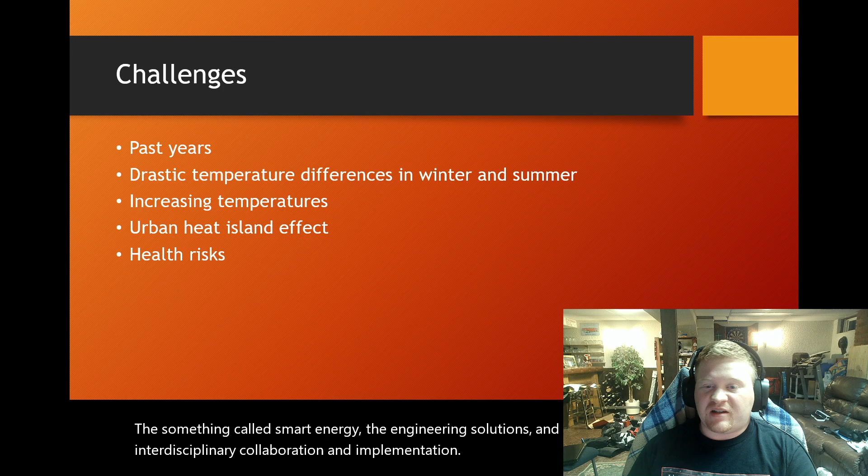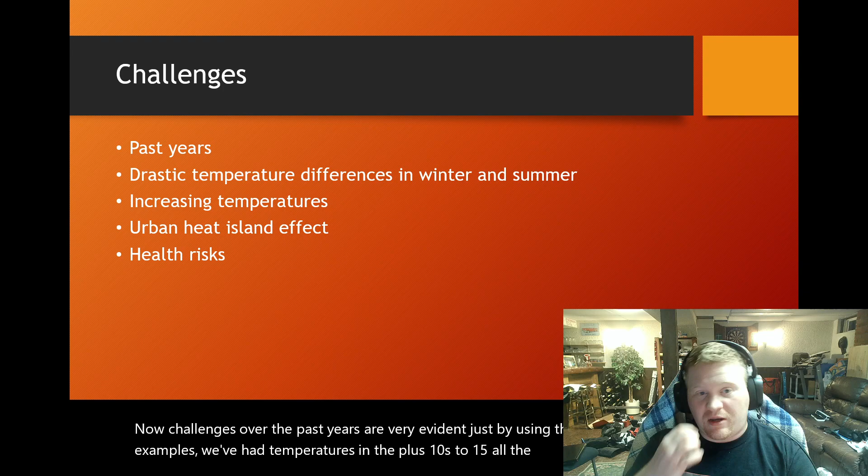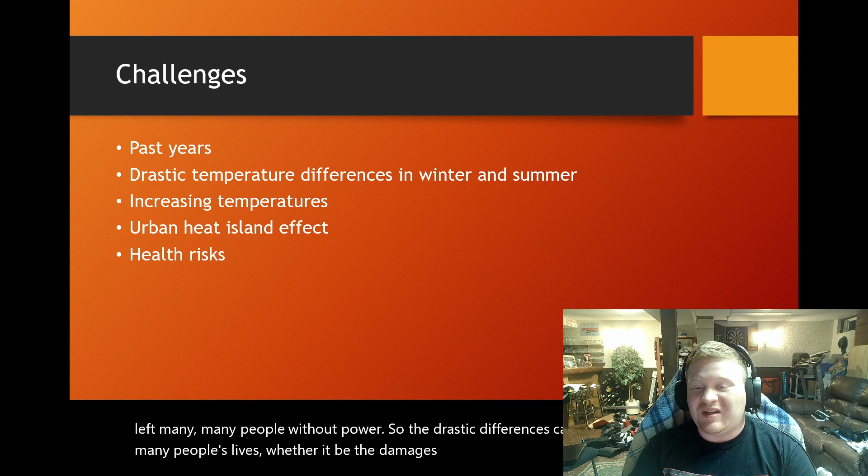Challenges over the past years are very evident just by using the last few weeks as examples. We've had temperatures in the plus 10s to 15s all the way to freezing rain, which has left many people without power. The drastic differences cause complications in many people's lives, whether it be the damages caused or the inconveniences at the tail end of the temperatures, mainly the heat.

There's a thing called the urban heat island effect, where areas like Toronto face amplified heat due to materials like asphalt and concrete, raising the temperatures further.

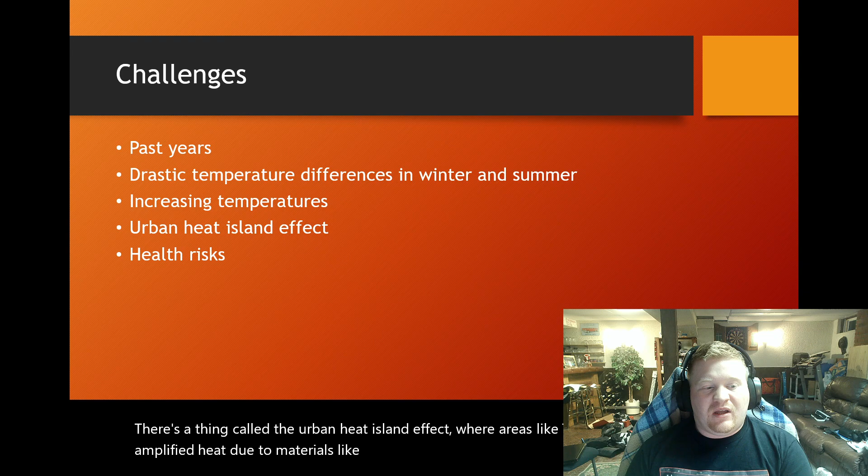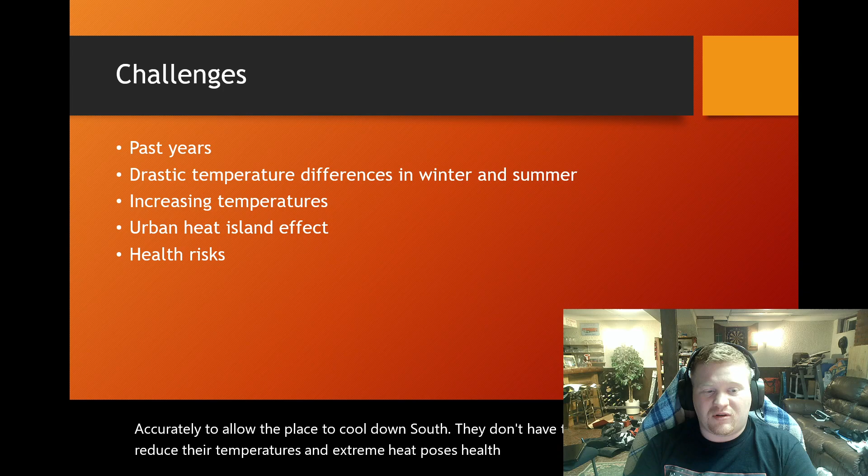Due to the buildings constantly surrounding the area and their height, they retain that heat. There's not a lot of room for wind to flow to allow the place to cool down. So they don't have too many alternatives to reduce their temperatures, and extreme heat poses health risks such as heat stroke, dehydration, and respiratory issues, especially for vulnerable populations such as the homeless, elderly, or those with pre-existing health conditions.

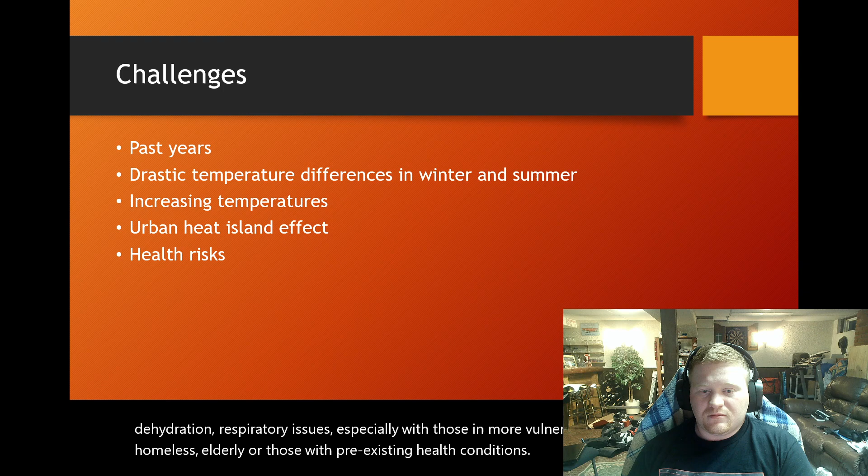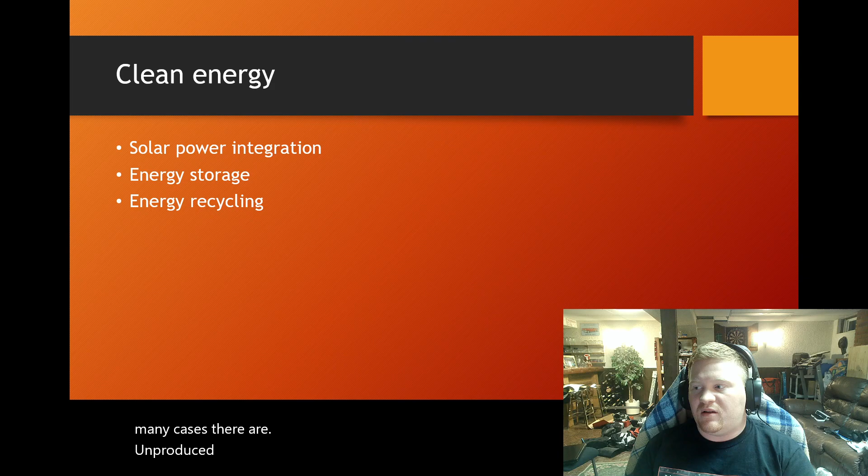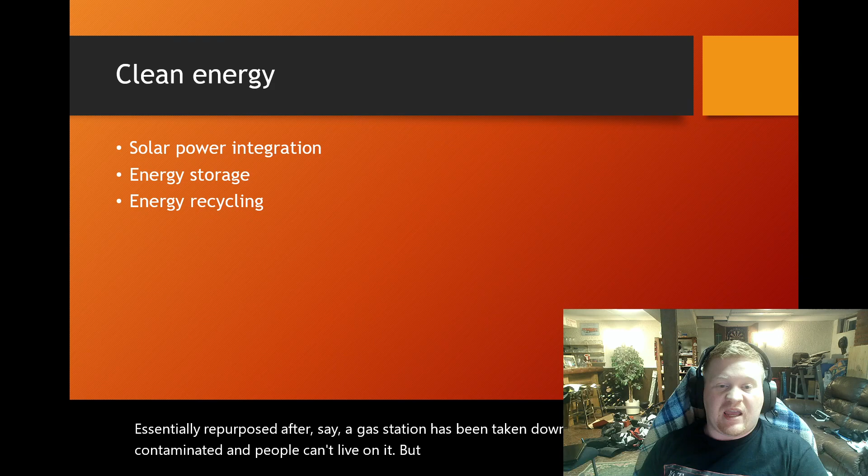Some of the ways you can go about it is by using clean energy, such as solar or wind power. Solar panels provide abundant electricity during peak sunlight hours, and in many cases there is unproductive land that hasn't been repurposed after, say, a gas station has been taken down because the area is contaminated and people can't live on it. But that's not to say we can't build on it and make use of the land for the 12 to 50 years it could potentially stay unused while the area cleanses itself naturally.

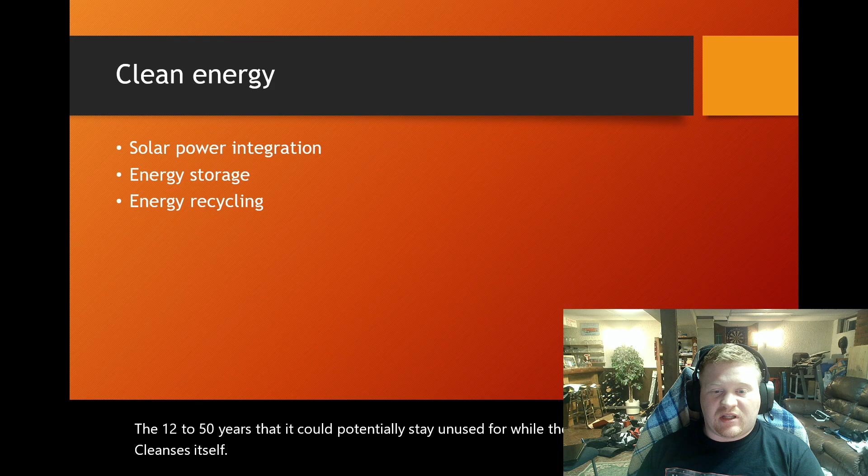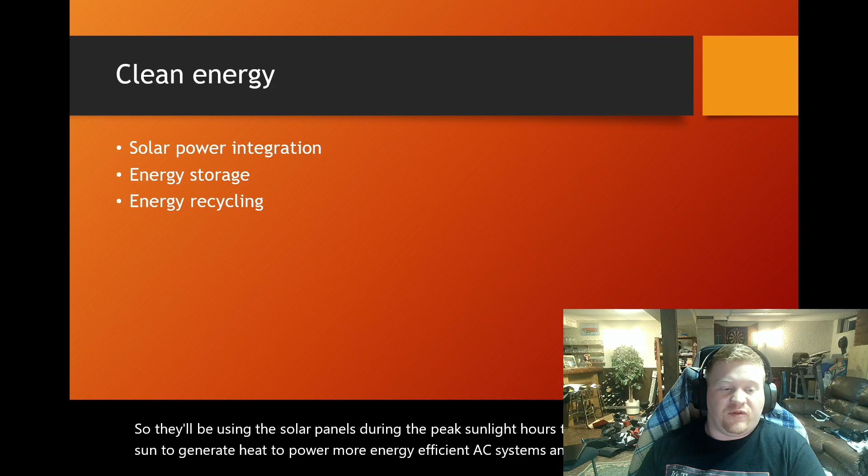They'll be using the solar panels during peak sunlight hours to absorb the sun's rays to generate power for more energy-efficient AC systems, reducing the reliance on fossil fuels, which other people might be using for generators to power their AC systems.

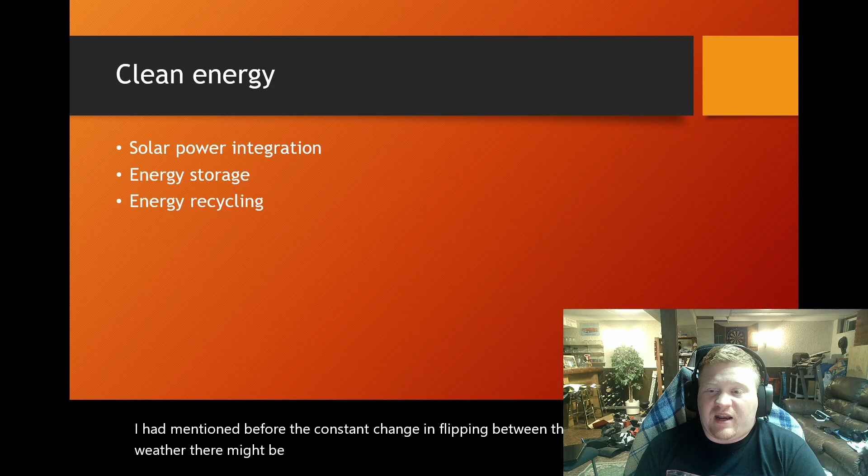The other thing would be the excess energy created by the solar panels can be stored in batteries for use during non-sunny periods, improving efficiency and reliability. Like I mentioned before, with the constant flipping between temperatures and weather, there might be times where we do not have extreme heat and we'd be reliant on that stored backup energy.

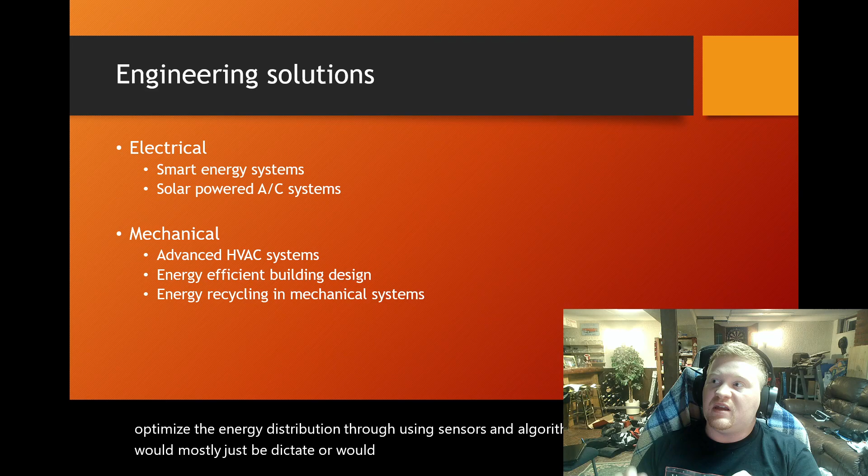The engineering solutions would be very straightforward. We can use smart grids to optimize energy distribution through sensors and algorithms. These sensors would mostly be measuring the existing humidity and temperature on multiple surfaces to see where the heat would be most affected, so they could distribute energy for those AC systems more efficiently.

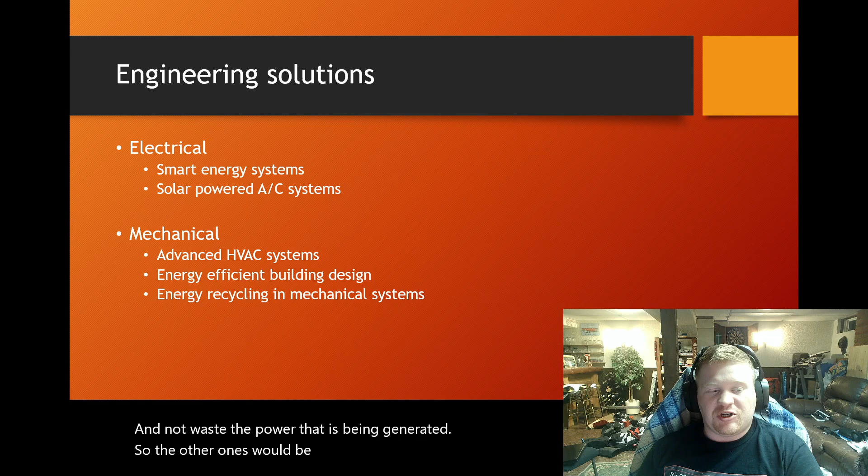And not waste the power being generated. The other aspect would be mechanical engineering, where energy-efficient HVAC systems would use variable refrigerant flow to properly adjust cooling output based on room occupancy.

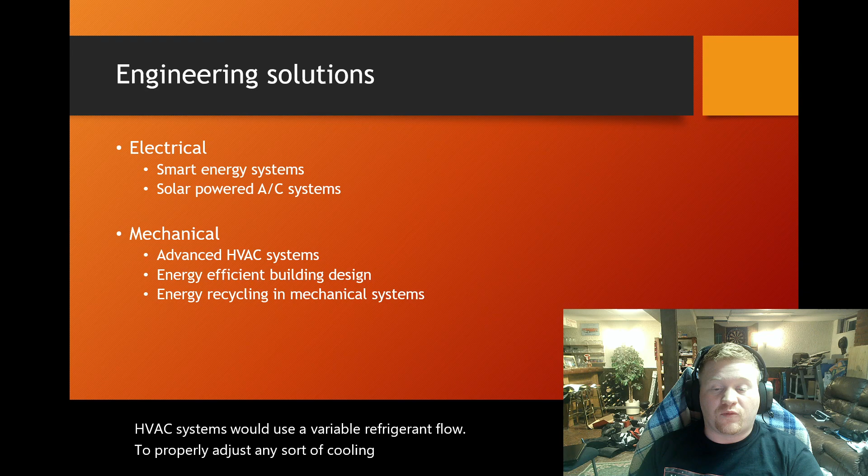If a room would only require 5 to 10 people in it at max, it wouldn't need as much as, say, larger rooms with higher ceilings, to allow heat to rise and circulate the air conditioning better.

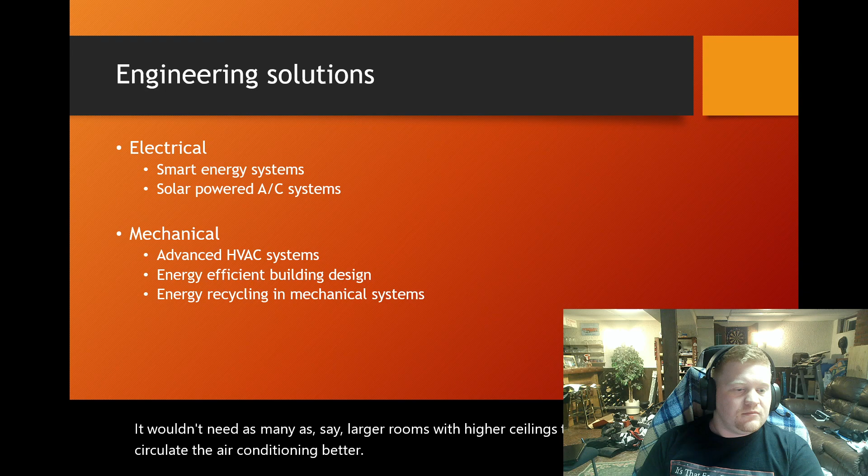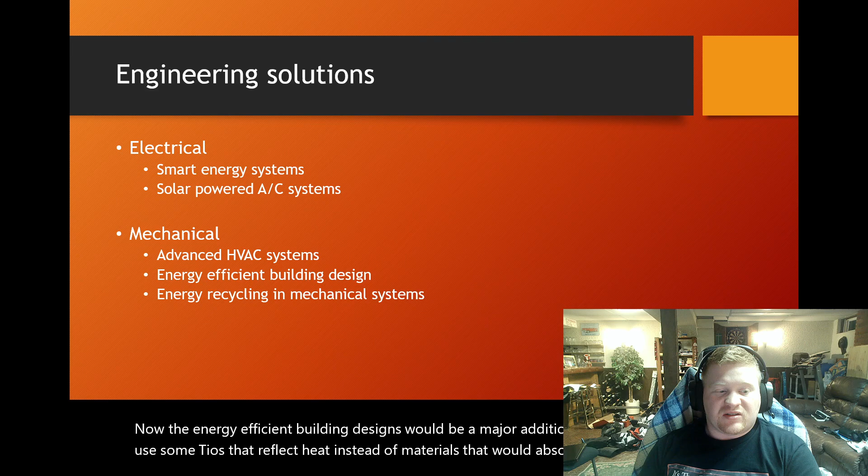The energy-efficient building designs would be a major additional plus, where you could use materials that reflect heat instead of absorbing it, such as green roofs and reflective coatings, to lower indoor temperatures.

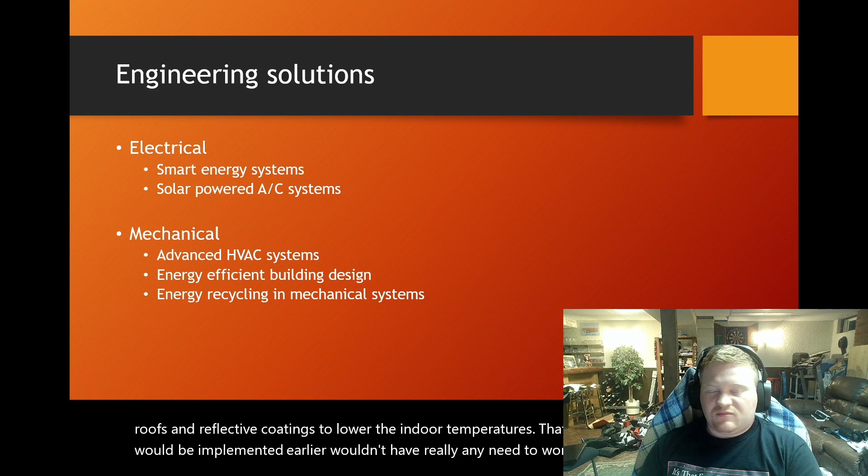That way, the sensors implemented earlier wouldn't really have any need to work overtime, so the energy being distributed is more efficiently used and recycled within its own systems.

The interdisciplinary collaboration and implementation would involve government and community. The government would have to develop policies where engineers work with government agencies to implement sustainable solutions, such as incentives for solar panel installations and energy-efficient appliances.

One of them being, when you are using solar energy, the main priority is to power your own home. In doing so, when you're generating your own electricity, you're saving costs, and you're generating energy throughout your whole day.

Anywhere you're not using lights or existing power, you're essentially able to store up energy and sell it back to hydro, making back some money to further cushion the financial blow of installing these panels or having them long term. Having them long term has them pay for themselves.

So the government would have to improve or implement these existing plans in order to make this a feasible design.